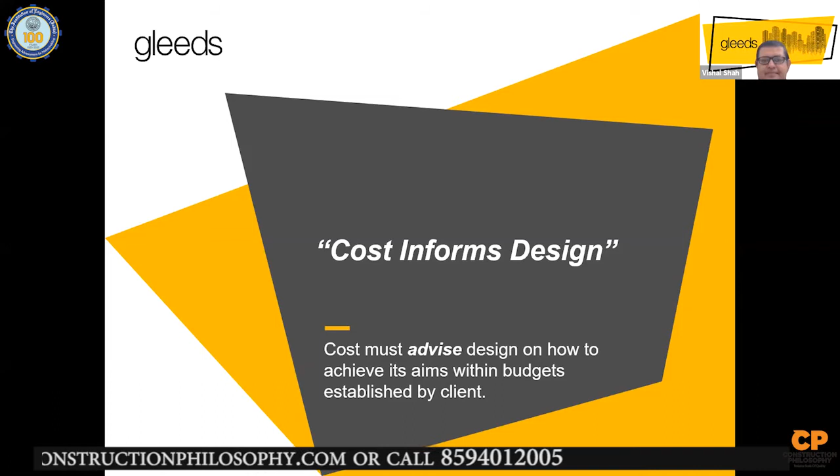As a cost manager by profession, my belief is the cost should always inform the design. So design can take the right decisions and right options so that the budget which is established by the client is met and optimized. So the cost manager's role should always be a supporting role to the design. We don't want the designers to not experiment. We want them to experiment. We want them to create great structures. However, at the same time, we want to make sure the budget which is established by client is proper.

So in cost management, there are basically two major aspects. One is pre-contract and one is post-contract. In the pre-contract, basically we talk about anything from initial design stage till the award of the contracts, which also includes various cost estimates. It includes escalation, contingency, value engineering and management, which Kashi sir has already started explaining you since the last couple of sessions. We also talk about benchmarking. How do we make sure the project is optimized and done properly? And then we go to the procurement route, which way to procure the contract, what should be the tendering process, how do you evaluate the contracts. So these are the major aspects of pre-contract cost plan.

And when we go to the post-contract, which Sini will take over in her sessions, it's basically after the award of the contract, what happens? How do you manage the cost on site? How do you measure things? And how do we ensure the project budget is kept within the allocated numbers during the post-contract? She will also touch base on the claim management part of it. So we have two sessions on pre-contract. Today we're gonna talk about the green part, from the development cost of the project to the benchmarking. And tomorrow we'll talk about the procurement routes till the contract.

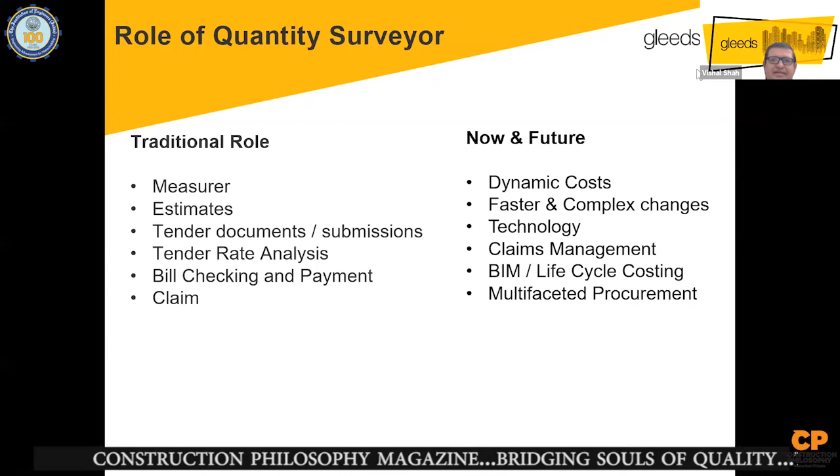And now the procurement methods have completely changed. Earlier, there used to be a master builder; you would buy the material, and he would do all the labor work, but that's no longer there. Now things have changed into alliance contracts, integrated project deliveries, or design and builds. So there are various aspects which we will touch base on during the course. There are many of these aspects which a quantity surveyor is expected to know and expected to guide the client on, right?

So this is what the budding QSs and the professionals need to understand, that we are no longer the guys who would do the measurements. We are no longer the guys who will certify the bills. Yes, it's part of our job, but our more important job is to make sure that the client has the right information to make their decisions.

There are various asset classes and various kinds of structures, from residential to warehousing to data centers to commercial buildings to retail malls or hotels. One really needs to understand each project typology to see where the cost would be. How do you make sure the project is rightly done with the right and optimized cost, right?

When you look at the cost aspect, there are various types of cost. There is a land cost, there is FSI or a TDR, what we call in Mumbai, and FAR, what we call in other parts of the world. The building and site improvement, the interior fit out cost, then the approval cost to get the permissions. Then we need the money, so pre-opening cost, working capitals.

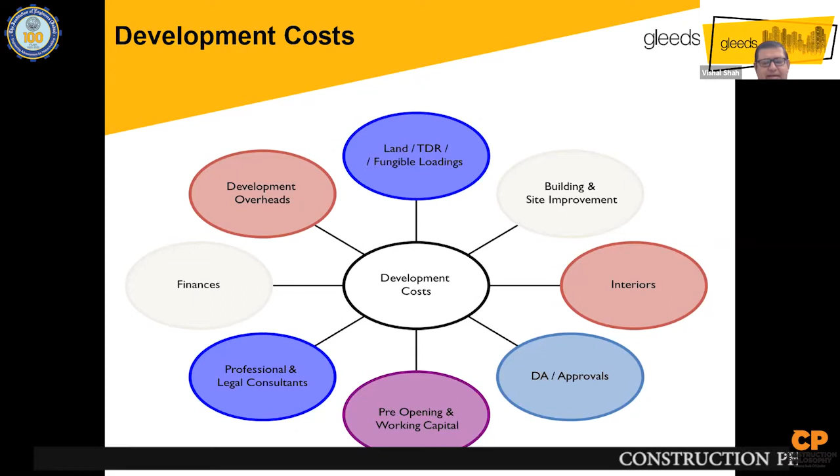But when you work as a consultant, you probably have understanding of both aspects almost simultaneously, because at times the client would share all this information, most of it, to make sure that the feasibility numbers we are providing are correct, right? So just going back into detail of all this development cost, right?

So when you talk about the stamp duty registration, this is just to give you a flavor that when we talk about land, it's not just the land. There are other aspects associated with that, which you need to consider when you're putting the numbers together. So it is not just land, but the registration cost, the taxes, the legal or tech due diligence the client would need to take, the market research for feasibility, the brokerage we need to pay, and the approval cost. So all this is part of my land and approval bucket, which I need to consider.

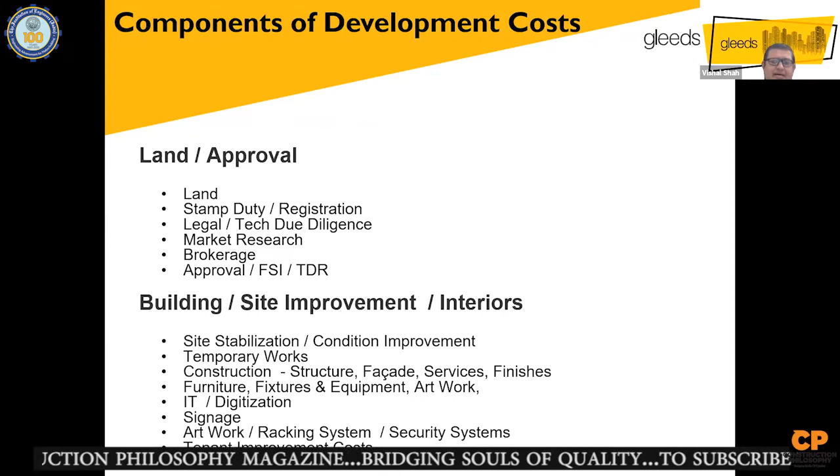So when you look at the site and the building improvement, at times you need to go with piling, or at times with raft foundations, or you need to do temporary works to make sure the work happens, like diaphragm walls, and the different types of structures, the IT cost, and especially in malls, tenant improvement comes in. You provide the structure and common area, but in some of the larger spaces you'll do some improvement for the tenants who will come in. So you need to allocate money towards that, right?

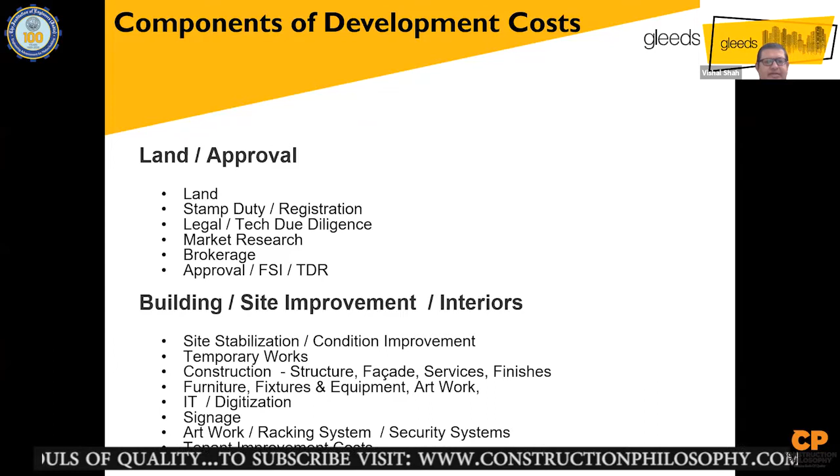Then you need to look at the operational cost in terms of OS&E, or first fit, as we call it for hotels. You need to give, like, three sets of spoons or five sets of plates. That's also part of your development cost, because without that the project does not start. When you launch the project, there is a marketing cost, parties you probably need to throw, and you need to make sure that all the snags are closed out. So these are various aspects of development cost which one really needs to understand before we put the final numbers together, right?

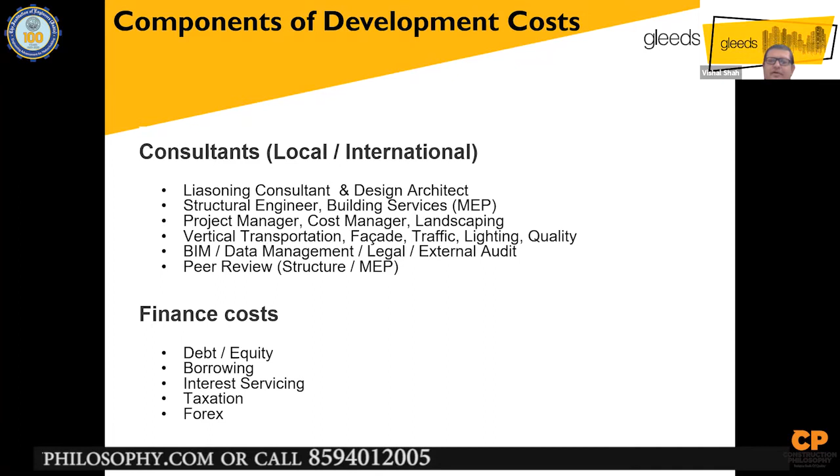There are risks which you need to cover. For example, Forex, that's a risk you need to cover. There are internal costs and internal risk costs which you need to carry. The insurances you need to purchase, right? So all this is part of my development cost. So when I look at the overall project cost, I need to look at all these aspects before I start putting down my numbers. How do we take care of the whole process of cost management?

There are various ways AACE has done it, or even RICS or RIBA. There are various stages, as they call them. The typical and standard terminology in the industry is feasibility stage estimates, concept, schematic, and DD. These are the four major stages where the design gets developed, and you use this time to fine tune your design and make sure the project is proper, right? At each stage you need to provide a cost estimate or cost plan, which needs to be tallied with the client's internal sign off that okay, this is the project.

For example, I was part of a project in Trivandrum where we did a hotel, Taj, and the client said, look, I have X amount of money. I cannot spend beyond that. So the cost manager's role is to make sure that it happens before that, right? So these are the various stages. We'll go into detail on this as well.

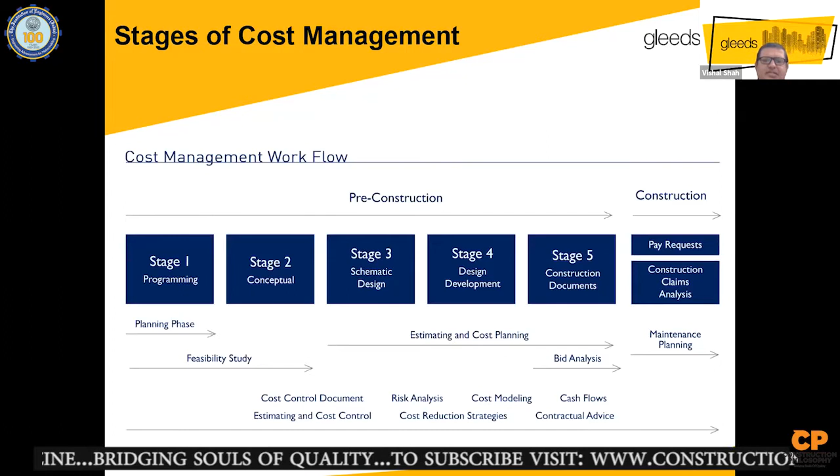And during this process, we need to carry out value management. We need to carry out risk management. We need to carry out options engineering. We need to look at what's best and the life cycle costing around it, the whole life cycle cost. So all this needs to be done during these phases, right?

All right. So when do we really start cost planning? Cost planning can be started as soon as you have a cost planner engaged by the owner on board. At times the cost manager is on board before designers, because the client wants to know: okay, this is a piece of land, this is the kind of project I want. Can you tell me what is my cost? Whether I can afford this or not, right?

They might have a concept or they might have a sort of a benchmark project. Okay, this is a project I like. What can be done in this area, at this price, and tell me whether it works or not. So the cost manager provides them an initial feasibility cost estimate. This budget, if signed off, then needs to be monitored during the design and construction phase by the cost planner, who will advise the client at various stages.

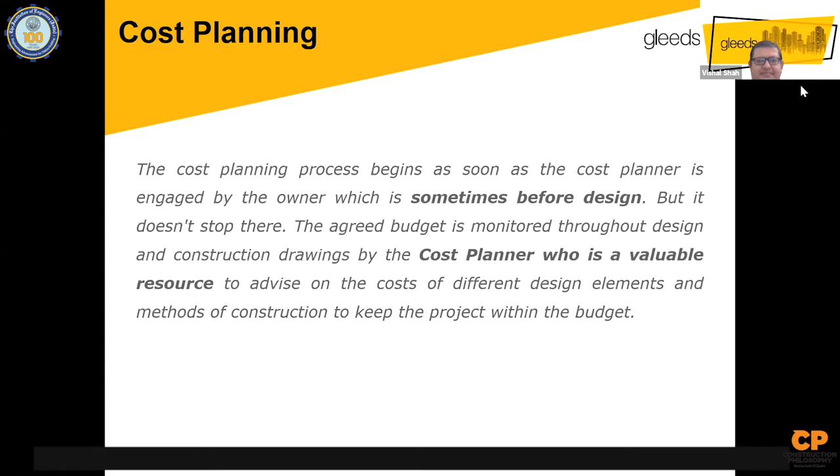Cost planning allows us to do the feasibility of the project, right? And as I said, the cash flow of the project. Again, through cost planning, I would be able to provide the cash flow so the client can understand by when they need money and how much money they need, so they can be ready with the funding available.

Why do we need to do cost plans? Cost plans need to be done not just on a back of the envelope calculation. It has to be done in a scientific manner, in a required process, because the professionals the client hires are expected to have in-depth knowledge of the local market rates, the processes, the contractors, to understand what can be done. Can we go with two basements? Can we go with a single basement? Can we do podiums? Can we change the facade type? Can we go with precast construction? All that is expected to be known, right?

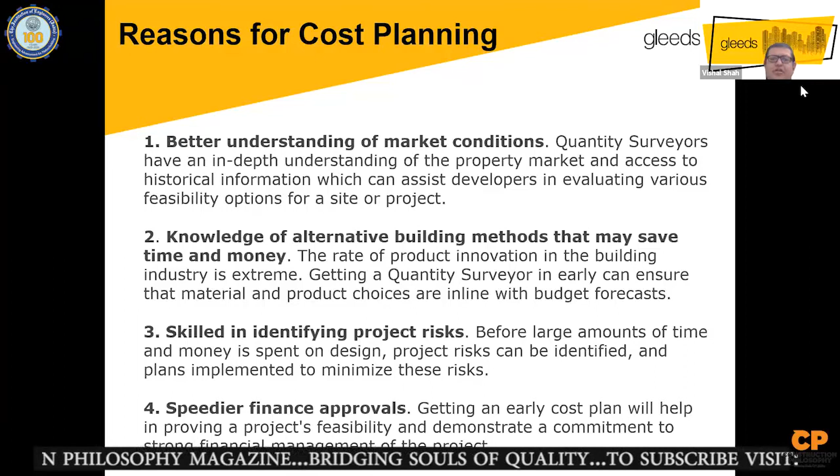And as a cost manager, you are expected to identify the risks on the project. So before spending too much time and money, the client would appreciate if you tell them, okay, these are the project risks, and this is what needs to be mitigated. Otherwise, you will have a project, and the project will have a problem, right? So these are the reasons for doing the cost plan.

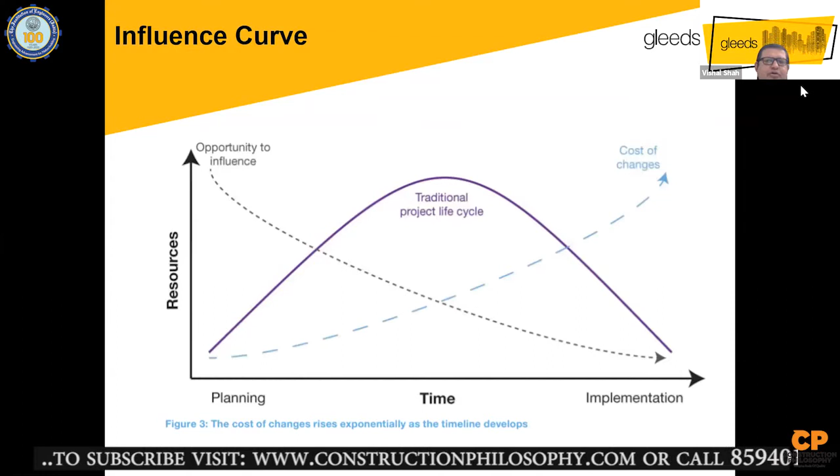Now, the place where cost managers can add value, and Mutaya Kasi sir would agree to this, is at the front end. The professionals can influence the project at the initial stage, during the planning, before detailed design. Because after detailed design and at construction, we are just trying to control it. The cost of change will go up and it does not make any financial sense to do it. The project is actually lost.

So the opportunity to do anything in terms of optimization is at the initial stage. And that is what needs to be done through the cost plans: identify those issues, inform the client and the design team that this is where the problems are, this is where we are going overboard. Can we look at this and can we optimize this?

For the various types of cost plans, if you see AACE, they have done it based on different classes, class 1 to class 5. And they have also provided a range of accuracy based on their understanding, based on the standards they adopt. So at budget level, at DD level, or at concept level, what sort of estimates are required.

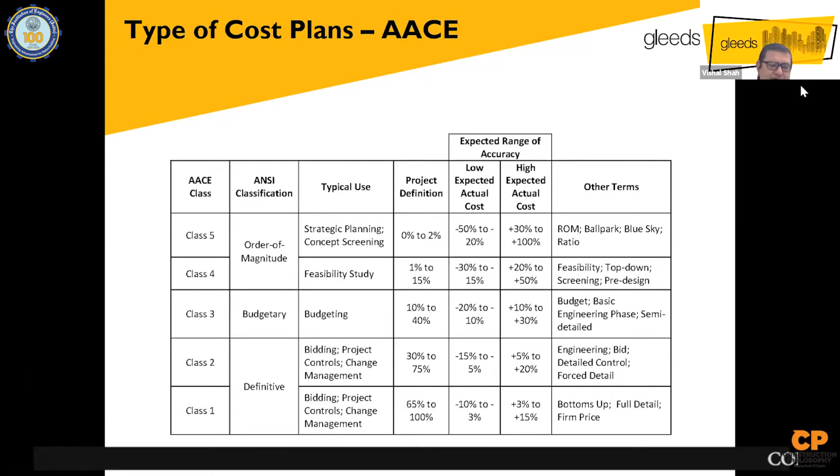However, what happens in reality is clients expect cost managers to provide very close numbers, plus or minus 15% at the feasibility stage. They want to make sure that the cost managers they hire, internal or external, have that kind of accuracy or understanding of the market, so that you are in the right ballpark, because that is where the major decisions need to be taken. So these are the stages.

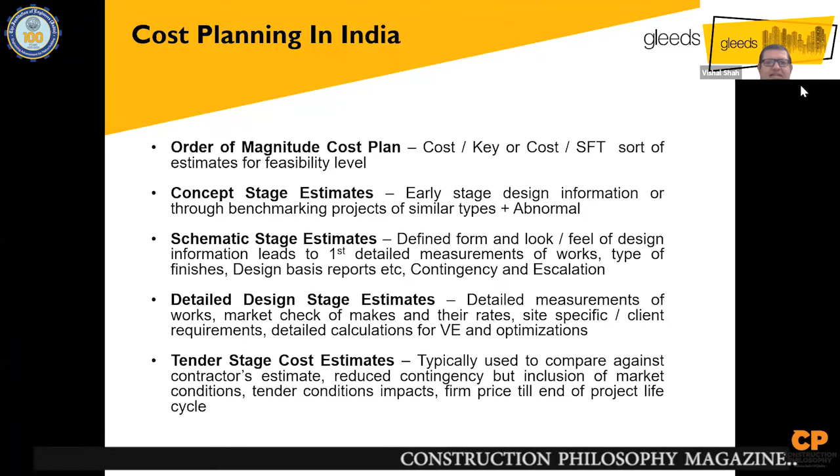However, when you look at India, we carry out order of magnitude cost plans, concept stage cost plans, schematic, DD, and tender stages. And all these cost plans happen along with the design. So the time you have available to carry out your study is often in conflict with the design program. So the cost manager is expected to work along with the design team as much as possible and try to provide the numbers so that design decisions can be taken.

Yeah, right. So how do we do the cost plans? What's the process? The process of cost plan is, before we start the cost planning, we need to understand what is the basis of the contract, how the project is going to go, what is the project schedule.

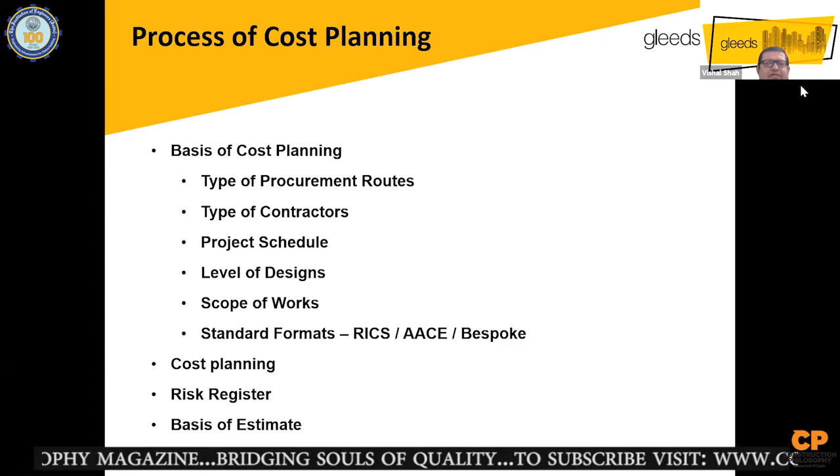What level of designs we have, what sort of information we have, what is the scope of work, what is the battery limit for the project, what can be done, how would the client want the estimates to come by, what kind of formats. And obviously we need to generate the basis of estimates, we have to generate the risk registers, as well as the cost report, which has the amalgamation of everything we have done for the project.

Right. Before we start on the key cost drivers, I just want to mention something here. When you look at the project, look at it from the sense of how this project looks, where the project is going to be positioned, what are the abnormals for this project, what is different here compared to other projects, and try to walk the project in your mind before you start doing the cost plan. This will help you formulate your questions and your thought process, so that your estimates become more and more robust.

One of the worst things we have seen in industry is starting the project on a wrong estimate, because when you do a wrong estimate, the whole project will suffer till the end, because that number is never achievable. You cannot meet the target, and there is always a struggle for each and everything in terms of procurement, designs or selection of alternates. Everywhere you'll have that trouble. So that is what we need to think about.

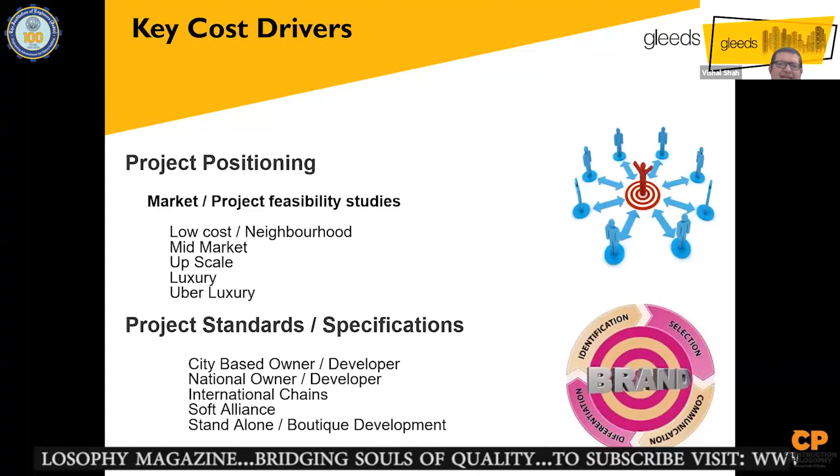So for any project, any cost plan or cost estimate, we start with what is this project all about? Are we targeting low cost housing, mid scale housing, or luxury? What kind of hotel is it, 5-star, 4-star? What kind of commercial building is it, a grade A building or grade B building? Based on that, we understand where the position is, so our mind gets fine-tuned to the type of structure, the finishes, or the type of contractor to expect for this kind of project.

The cost also differs quite a bit based on who the promoter is. A local city-based owner has a different cost. Someone from outside would like to reduce his risk, so he will go with someone who is maybe more expensive but reduces risk for him. So again, you need to understand where the project is going to be pitched and who's doing it, and based on that, the project standard gets defined.

You also need to look at the ground conditions, for example. As I said earlier, pile versus raft versus standalone foundations, or any other regular kind of issues. Or what are the locations? For example, doing something in Mumbai versus Kolkata versus Kochi has an impact on labor cost, material cost, the transportation cost for material which is not available in your city, or the cost towards imports, whether it's a metro or a non-metro location.

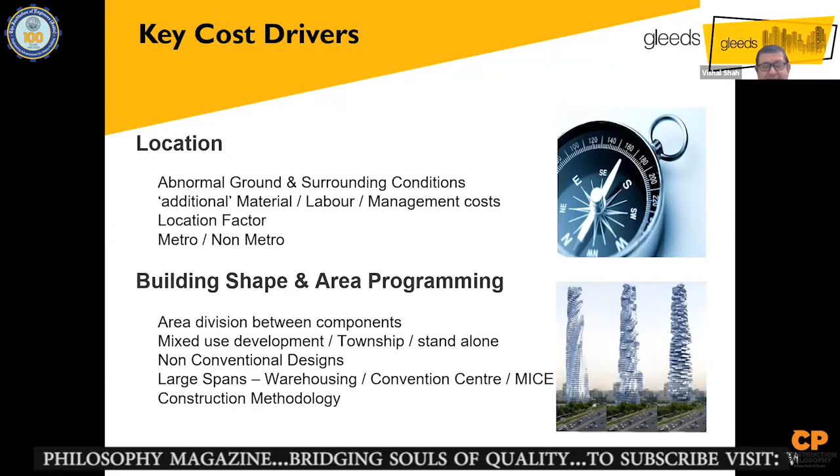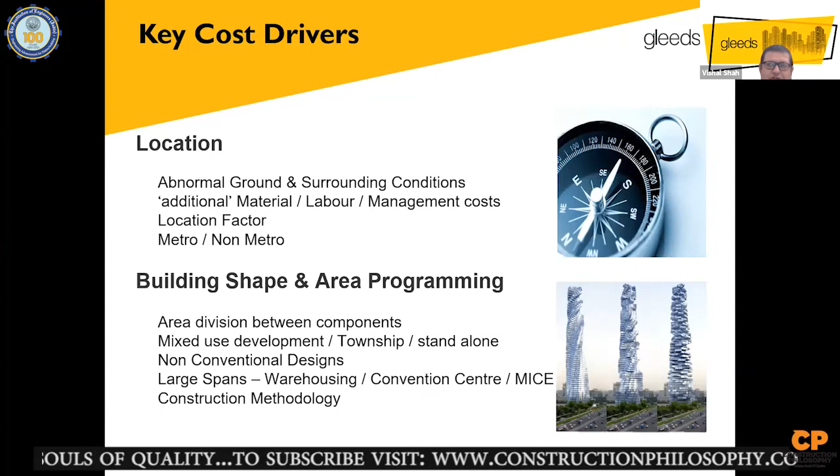We also need to see, like I said, let's take a hotel as example. So in that, front of the house versus back of the house, the components of that, how the parking requirements changes. For example, if you look in Pune right now, in Pune's market, Pune has one of the largest requirements of parking as per the bylaws, which is very different from what we do in Bangalore or Hyderabad. So that means my substructure cost or my parking cost will go up if I'm doing in Pune, right? Because my sellable area still remains same. I'm doing similar, but my parking area will require addition.

It will also require, based on the mixed use project or based on standalones, the sharing of the common utilities, the sharing of the spans will change. If you are going with a retail with 11 by 11 grid versus a residential with 9 by 9 grid, it will have different structural components. The methodology of construction would change. For example, I would have a Mivan or aluminum formwork in residential, while in commercial, I may not need to do that because I will require a PT there. So in PT, I will not use that, right? So these are some of the factors, again, you need to look at.

From design perspective, you need to look at what is the earthquake zoning in that particular area. What kind of framing option are we looking at? Are we looking at concrete? Are we looking at composite? Are we looking at steel? Are we looking at any special fire protection norms? Now, the fire protection would change: if you're doing a structural steel, you need to provide a 2 hours fire rating, which typically we don't do because we always construct in concrete, and concrete already has enough fire rating. But if you're doing it with a steel building, you need to add up all that aspect.

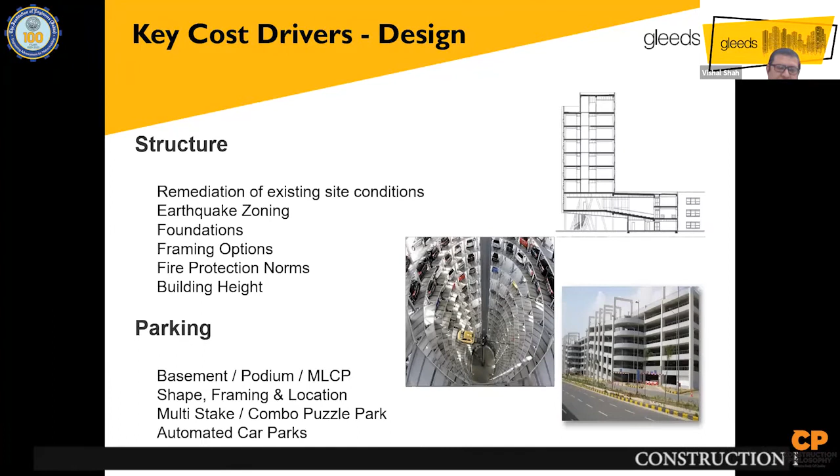And again, the typology of that fire protection, whether you go with a regular vermiculite, right, or you can go with a fire paint. Fire paint obviously is more expensive, but aesthetically good. It also depends on the type of structure. The type of structure in terms of building height. When you are doing a super tall structure, or we're looking at a G+4 or G+5 structure.

How we take care of parking requirements within the building. Are we going with 2 basements? Are we going with additional basements? Or are we going with multi-level car parks? Or are we going with a robotic car park? All depends on the building geometry, on the plan requirements and how they want to do that, and the future aspirations of the particular area. Yeah. So based on that, again, there are cost drivers.

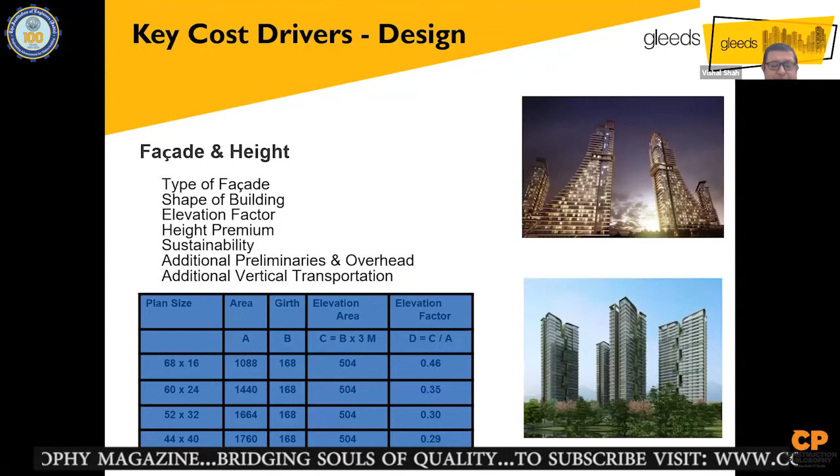One of the studies what we have found, when the cost managers look at, is the ratios. There are various ratios. The ratios of built up areas, parking to built up and that. But another key area is the facade. So in facade, the more squarer the building, right, it's better in terms of facade cost. And you also have rectangular projects where you have obviously larger lengths for the facade.

So if you see this example here, for a similar kind of areas, right, of 168 girth, but the floor plate area changed from 68 by 16 to 44 by 40, your elevation factor reduces. The lesser the elevation ratio, the more optimized the facade. And especially when you look at the tall towers, right? In tall towers, the wind pressure creates a huge effect. So you need to make sure that the design which is done is proper in terms of wind pressure and how you're breaking down that wind, right? So those are some of the cost drivers we need to consider and think about.

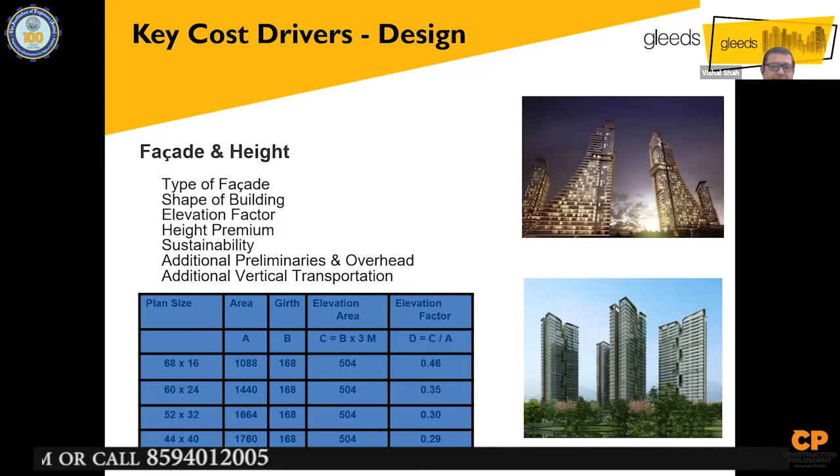So as I said, the area configurations earlier. Now, there are many projects we have seen at times where the areas are not correctly done. The room versus FOH versus BOH. Obviously, everyone wants to reduce the back of the house as much as possible, right? But what happens is the FOH area. FOH is front of the house, which is basically your lobbies, your kitchen, your restaurants, your banqueting areas, and all that.

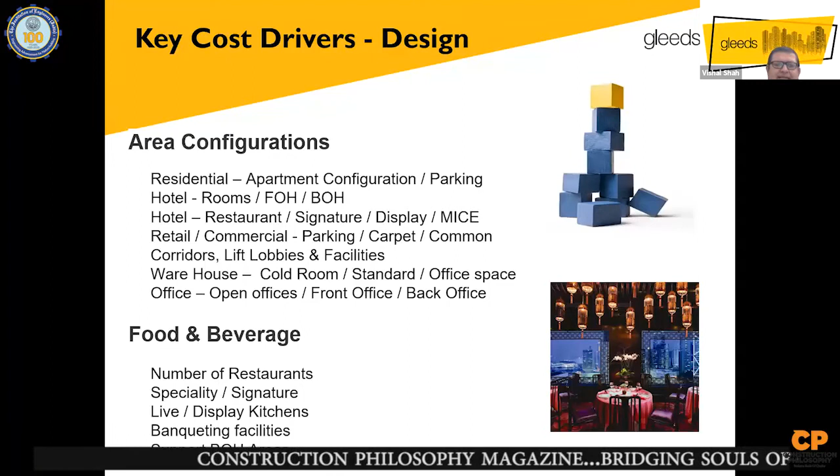If that is higher compared to your other benchmark projects, obviously your cost is going to go up, because you are putting everything on a cost per key basis, since that's one of the standards the hotel industry looks for: can my standard 5-star hotel be done in 85 lakhs a key? And because the areas are different, the cost per key shifts, and people, especially the owner, will start questioning why my costs are high. The way to explain to the client is through a detailed area statement, showing the difference in the areas and examples of why the costs have gone up while the keys are not getting added, but the cost is increasing, right?

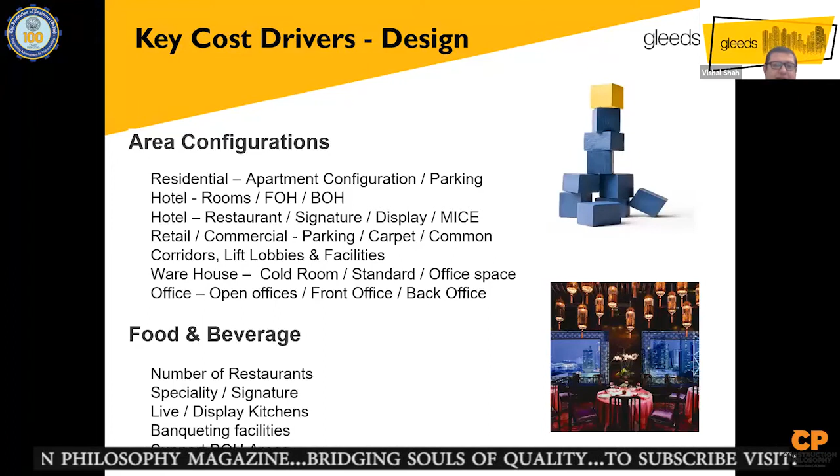The other area configuration in all the different asset classes, you can take a look. For example, in a warehouse, the amount of cold room space or office space; in restaurants, in hotels, how many restaurants, what kind of display kitchens you have, or whether you have a signature kitchen there. All that again will change our cost. Our cost plan needs to consider all these aspects before we submit to the client, right?

Coming to the building services side of it, if you're doing a project in Kochi, you may not need heating. But if you're doing a project in Ladakh or Amritsar, you need a heating system as well. At times cost managers would not take that, or at the initial stage people don't consider this kind of cost, but we need to consider all that when we work it out. The power backup requirement, the DG set, whether it's 100% DG, 50% DG or only for emergency load, will make a difference. We also need to look at the type of IT systems. The BMS systems need to be incorporated as part of the overall building.

In one of my projects, I had to bring power from about 7 kilometers. Per kilometer, I had to spend about 50 lakh rupees, and this was not part of my cost plan. So we need to consider this cost when we do the initial budget. Where exactly is the power? Is a substation nearby? Do we have the required availability here? If not, then we need to allocate funds against that.

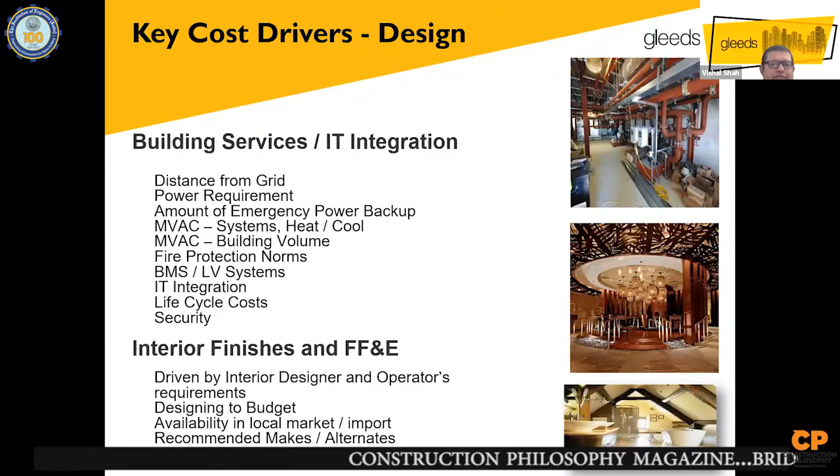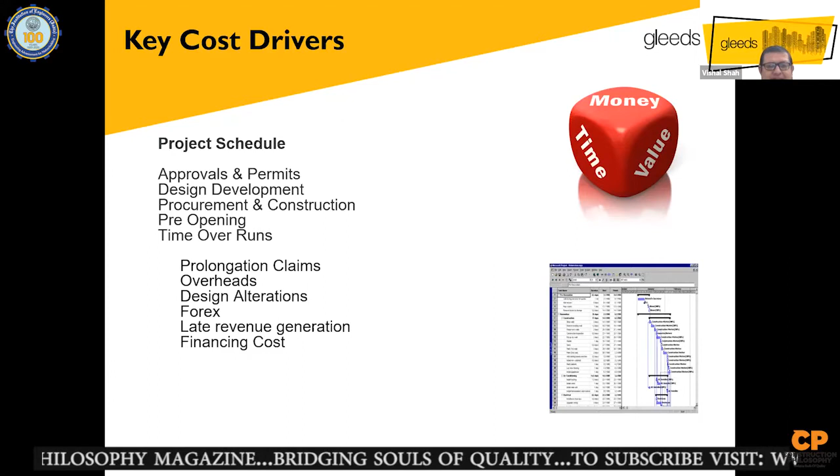Other cost drivers are your project schedule. For a smaller project, if you go with a longer project schedule because of a phasing requirement, for example, obviously your cost will go up because the contractor has to contain and maintain all the preliminary costs within that. And if your project goes beyond the agreed timeline, then you have to add all the other overheads. There could be contractors' claims, there could be forex fluctuations, and all that is part of your cost.

Another important thing you need to look at is how you calculate late revenue. Because if my project was supposed to complete in 36 months and it takes 48 months, that means I've lost 12 months of revenue. That's actually my project cost, and that's going to make my feasibility look bad. So you need to look for options to finish the project faster and better so that all these aspects are taken care of.

Other things you need to look at are the taxations. For example, what are the GST rates? In affordable housing, for example, we have 12%. In others, we have 18%. In some places, we have GST credits as well on the running expenses. Like in a mall, I can buy furniture and equipment and get a credit for that. So how do we take care of that? How do I get that money back in my kitty so that my client gets a better feasibility for the project? We need to consider import tax.

If your project is located in special economic zones or is an IT kind of project, then you need to have the cost benefit for the taxation. So all that you need to consider as part of your initial thought process in putting your budget and numbers together.

Another thing that always surprises me is the site development cost. The site development cost is a direct derivative of the area available for the site, to beautify the site, the road, the lengths, and all.

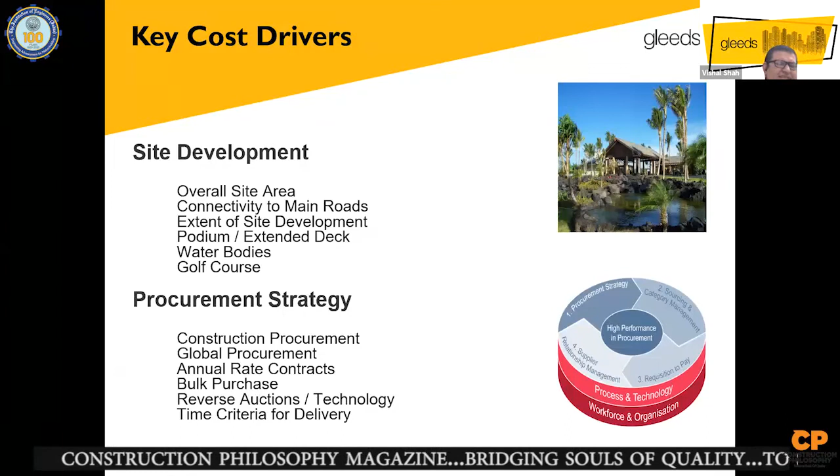It's not on a cost per square foot, because all your other benchmark costs that you take, okay, I've done it at 3,000, I've done 2,500, all this does not have that. And when we go into benchmarking, we'll touch base on that.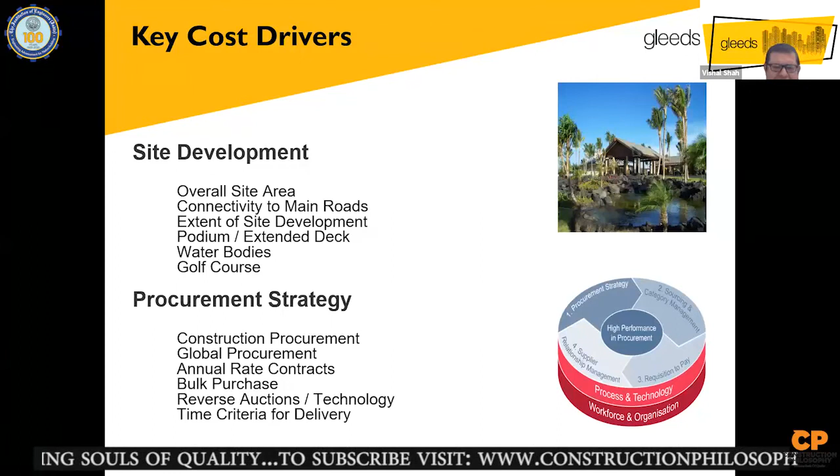Basically, what happens is that the client will have a large wish list, right? And it is our duty to explain that, okay, this is what this project has, and these are the add-ons, what we call a waterfall analysis, which we'll share again in the upcoming slide. So this kind of information needs to be provided, but you can provide it when you consider it. So when you look at the project, look at all these aspects before you put down the numbers. Ask yourself, okay, this is what is happening. What should I do here, right?

Again, when you look at the type of procurement, how are you going to procure everything? Whether it's a labor contract, or a material plus labor contract, a grade A contractor, grade B contractor, an international contractor, a composite building. How am I doing this? Okay, I have another 5 projects. Can I do a bulk purchase? Can I use reverse auction technologies? So all that you can work out along with the client when you start detailing out your design cost plans, concept to DD. Yeah.

So the type of procurement affects us. It affects various aspects, right? And we need to fine tune this procurement method at the initial stage itself. At the time when you do your initial cost plan at the concept, this should be at least more or less agreed with the client.

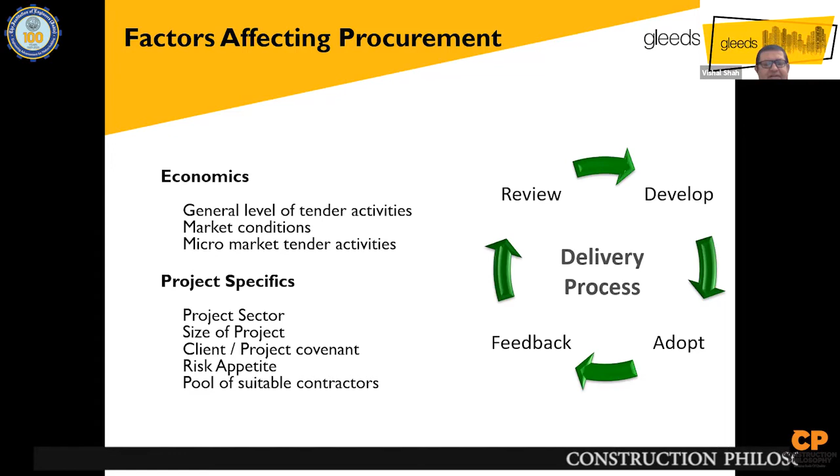So obviously there are various aspects, and it depends on the risk appetite of the client, the market condition, whether we have enough contractors over there. For example, if we're doing a project in Maldives, there are very limited vendors who are able to do it. And sometimes you will probably need to get people from Sri Lanka to do that project. And that is a different costing for those guys, right?

So you need to understand all this when we are looking at the initial cost plan, because otherwise, as I said, if your initial cost plan is wrong, you will get in trouble along the way, right? So design bid build, or a main contractor, or D&B, or alliance. Every one of these procurement routes has different cost parameters. It has an additional cost, right?

So if I'm asking someone to do a design build, the risk for the contractor will go up. So it's not going to be the same price as my design bid build. There will be a difference. If I'm asking a civil contractor to coordinate all other contractors, that means I have to pay him some additional cost towards nomination. I need to consider that as a part of my project budget.

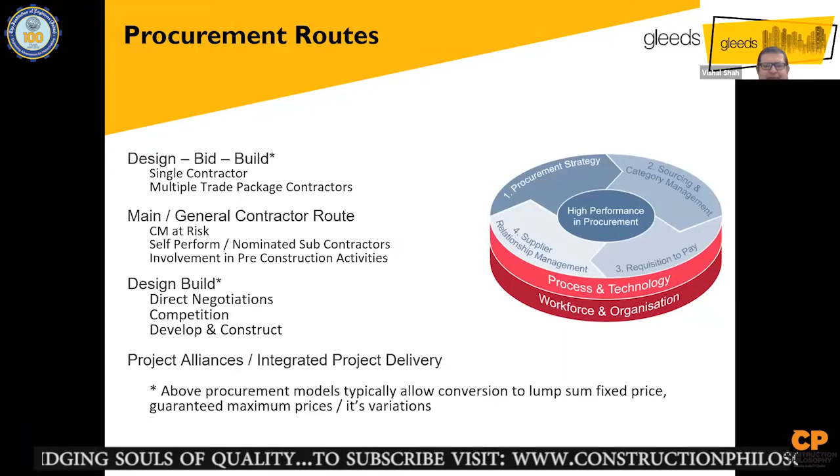Or if I'm doing an alliance contract or an IPD, there's a different way of calculation. It could be a cost plus as well, right? So that means the client needs to carry a higher amount of risk because it's a cost plus with the targeted GMP price, right? So it will have different methods, and you can obviously play around with different ways, mix and match, depending on what is suitable for the project.

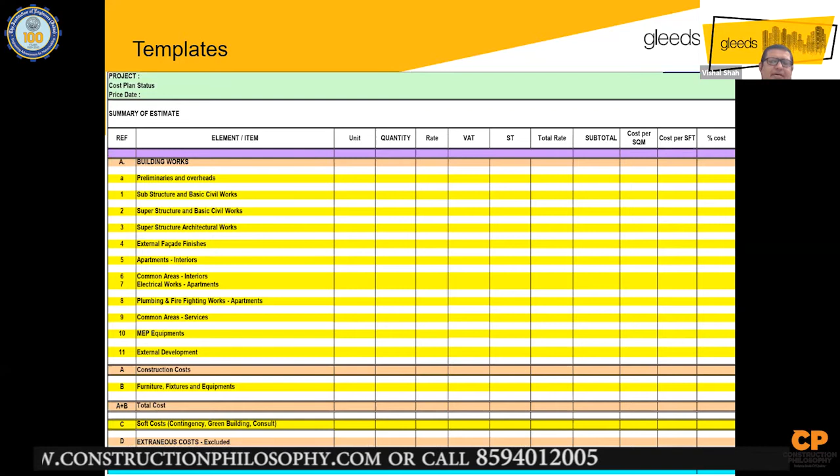You also need to agree with the client on what sort of template you want to provide. There are various templates. There are forms from RIBA, Royal Institute of British Architects. RICS has templates. Sini, as she mentioned on that day, she and her team have worked on international standard of measurements, and there are Indian IS code based ones as well.

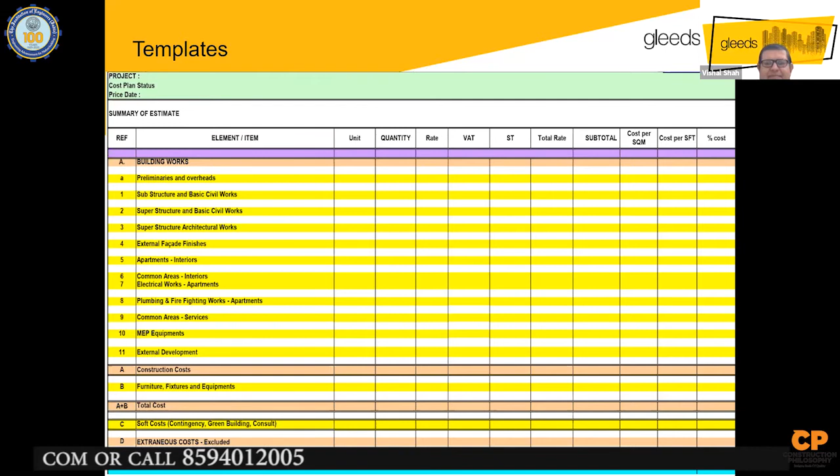So you need to agree and understand with the client what sort of template they want, because it becomes a very tedious and difficult task if you prepare a cost plan and the client says, okay, I don't like this format, can you change it to a different format? Because that means rework. That means you could even miss out on something, and it's not the right way to approach because the deadline will be missed, right? So the template, you need to agree with the client.

Typically what we do is we would like to have the basement cost separately. So that's the substructure and basic civil cost. We'd like to keep it separately, and superstructure we keep separate. And superstructure will have all of the superstructure costs along with that, right? So external facade, or apart. I mean, this was a residential template, so the common area as well as apartment interiors. So agree with the client what you need to do.

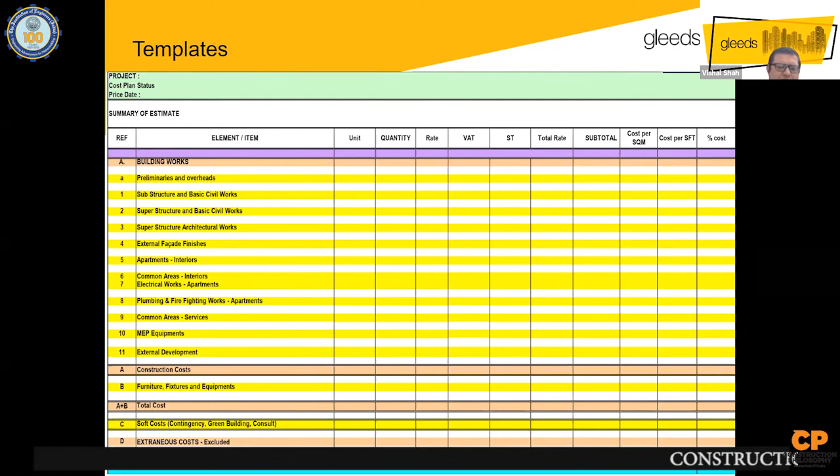Any questions till now? All right, moving on.

Right. So when you do the estimates, you need to make sure that your project budget has escalation and contingency, and adequate contingency and escalation. So if you know the market, if you see the crude price which went down drastically, or the US dollar which has increased drastically, uncertain labor. I mean, forget about COVID as a situation, but in general, labor is becoming less and less, and the price of labor is going more and more.

It's increasing quite a bit, and then obviously we are looking at any other escalation which happens as part of the overall project life cycle, 2 years, 3 years, 5 years period. How do we take care of that when we include it in our cost plan or even in tender, right? So just breaking it down in a different way here. Typically as a cost manager, I would like to have three types of contingencies. One, I would put for my design. So anything I've assumed from the design which is getting changed.

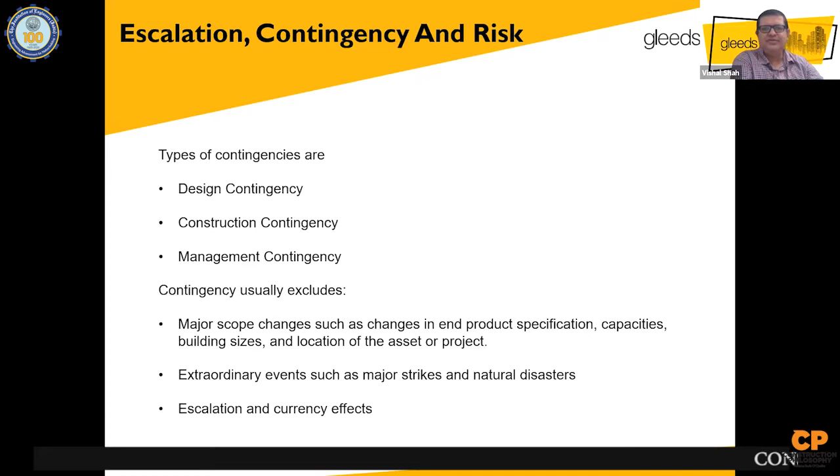The unknowns at site, especially when you start digging the foundations or the basement, you will encounter a different strata than what you assumed. In Bombay or in the western part, you typically come across the issue of soft rock versus hard rock, or there are issues related to the neighbor buildings where you need to do shore piling properly to protect the structures. Or when you start the excavation, you might come across old RCC foundations, right? So again, all those are unknowns which you have no control over.

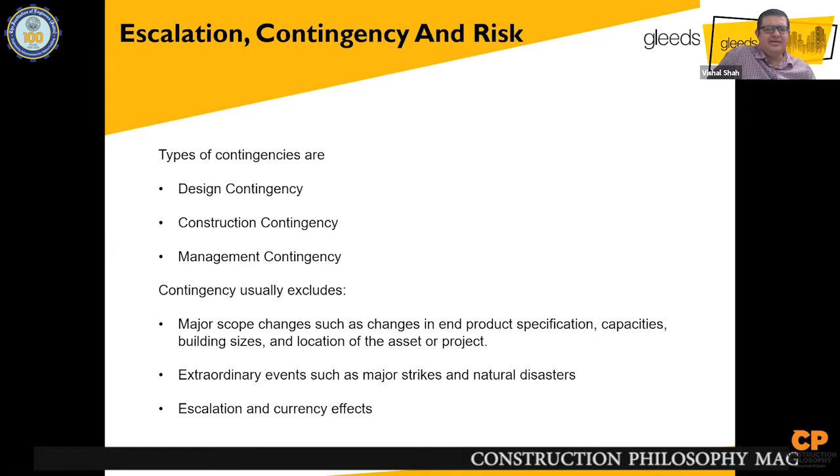There could be huge dewatering requirements on site. You need to carry a contingency towards it and make sure it is adequate. It should not be too high or too low. It should be adequate contingency to cover this kind of risk. And then you'll have a management contingency, where basically a client will decide, okay, I want to spend extra on artwork, I want to spend extra on signage because I want my building to look good. So that's a management contingency. That's a reserve which the client will have. But these are the contingencies which you definitely should have in your project when you plan it.

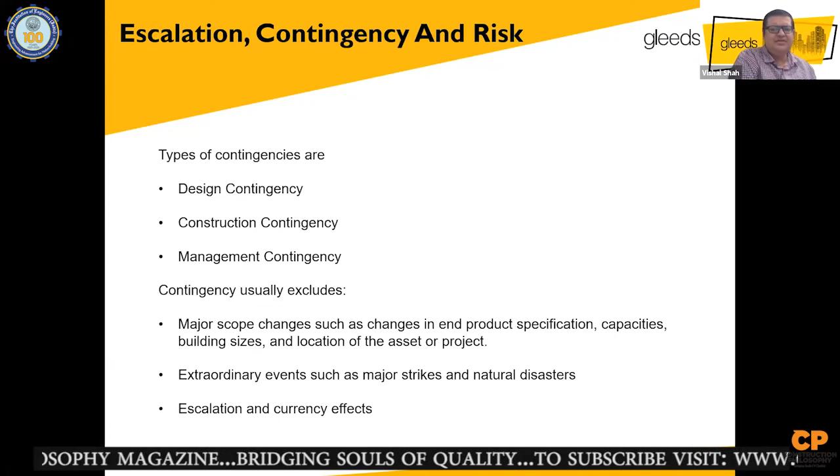Obviously, it does not take care of any abnormals like COVID-19, right? It's abnormal. No one can have that cost covered. Or any kind of major war situation, where escalation and currency effects will have a major effect. But whatever we know, we should price as per normal. The other way is, how do you take care of these contingencies?

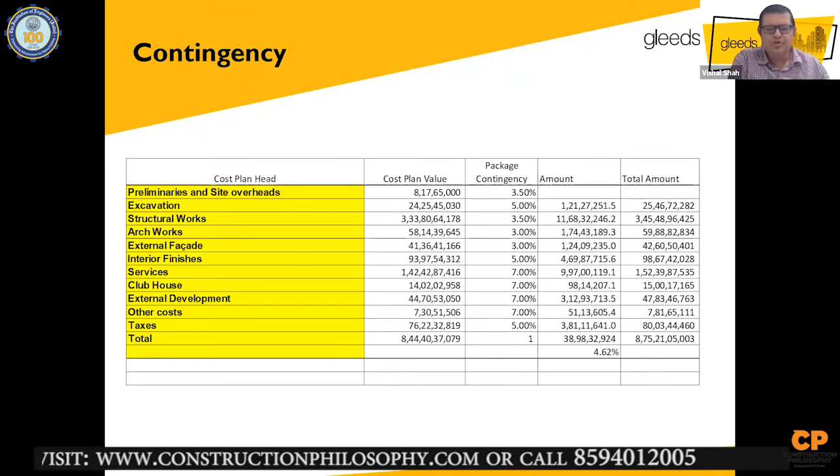What we typically do is we break down the project into various elements, and for these various elements we try to provide the value: okay, in this project this looks dicey, it does not have enough drawings, the risk is higher, let's go with higher contingency amounts. Don't go and agree a flat percentage, 3%, 5%, or 7%, whatever. Don't go on that basis. Always try to break down which element has a higher risk and which element has a lesser risk, and based on that you work out the package contingency.

So for example, in this case I've broken it down to ratios of 3s, 5s and 7s, and I've worked it out, right? You could have a different approach as well. You could put it down based on a risk analysis, which will come in the next few slides. You can even provide based on that. So again, based on that, your contingency value should come, so that anyone who's looking into it will be able to tell, yeah, it looks fine, or yes, there could be a potential issue here, and can go with higher contingency or lower contingency.

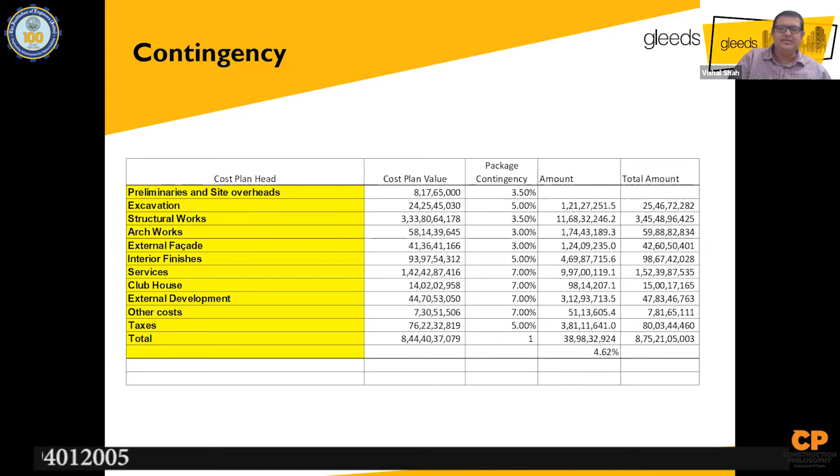Another aspect we come across is escalation. Unfortunately, in India, we do not have a right tender price index. We used to have one from CIDC, which they used to publish till 2019, but now they have stopped after GST. And CPWD is not really used properly for the private sector. So you need to work out your escalation. There are ways to do it. Gleeds have done their own. I will not bank on that; I will talk more about that. But there are ways to work out an escalation you need to consider as part of your overall project, right?

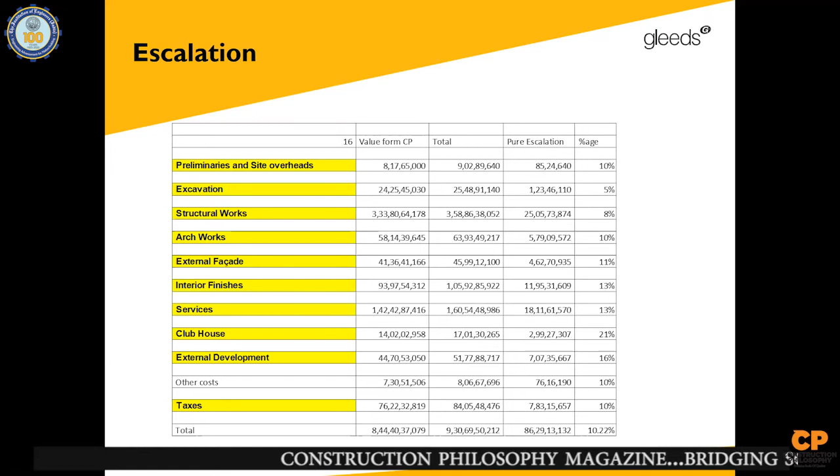The way we do it is based on a cash flow. We break down the whole package based on the project schedule, which quarter I'll need which amount, and based on that I work out my quarter to quarter escalation and provide a number.

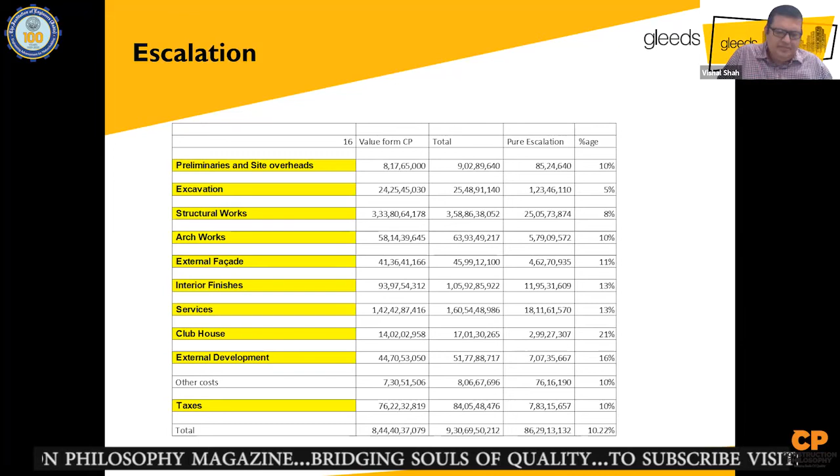One of the best methods you can do internally is look at your historical projects, look at the historical purchasing data, how much you have purchased or acquired, say concrete or steel or labor or shuttering material, and what you are pricing now. That will give you a fair idea of how much escalation has generally jumped up. Obviously, concrete and steel have cycles; it will vary. So you need to have at least a couple of projects in different vicinities to make sure that you are carrying the right numbers, right?

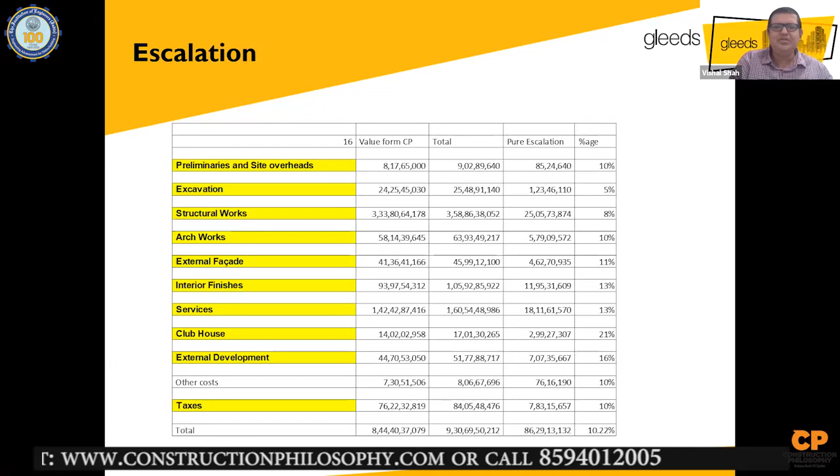Your cement price fluctuates a lot, and because of the situation we have in India, cement price is not stable, and steel is directly dependent on global trade and issues, right? So you need to take care of at least 5 years. Over the last 5 years take a few projects, 2, 3, 4 projects, work out the ratio, and then based on that work out your escalation. Don't agree based on CPWD or WPI, because again that's a mixed basket. It is not reflective of your project and your project issues.

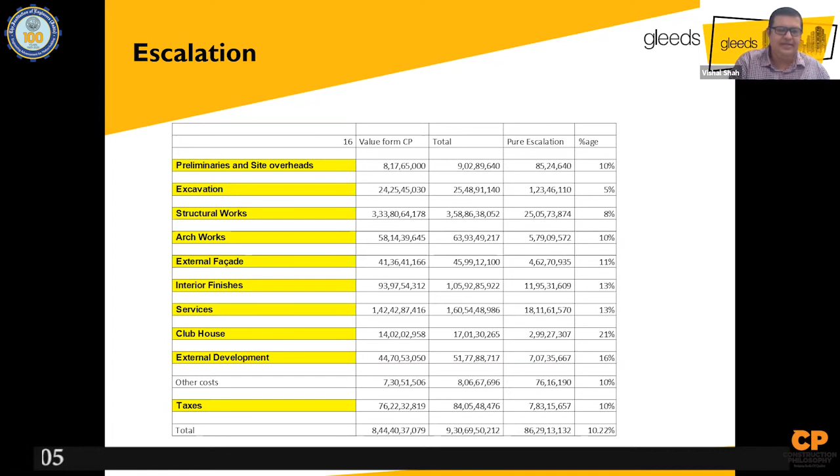For example, if you have a project which is completely glazed, your cost of aluminum and cost of glass will impact your facade quite a bit, right? But if you are using WPI or CPI, it will have a lower percentage of that impact inbuilt in the overall index. So that means you are factoring a lower amount of escalation, right? So that is something you need to consider and think about when you're putting the escalation numbers together.

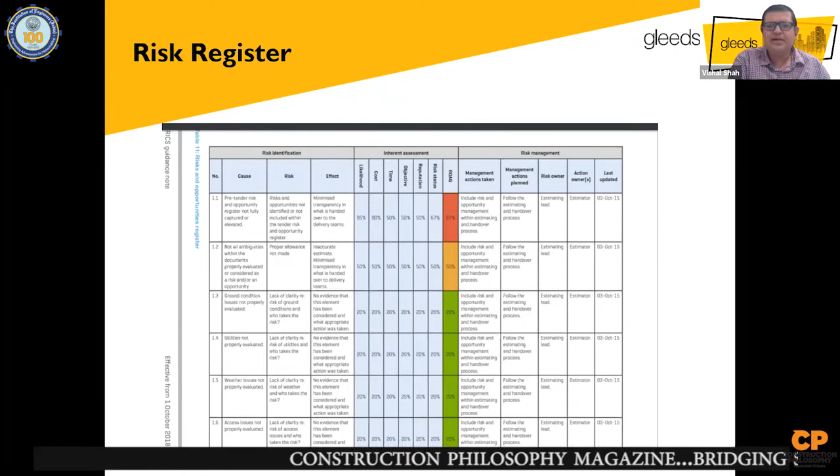The other way for the contingency, as we were talking about, is the risk register. The better way is you list down all the risks you think the project has, right? You put a RAG analysis, which is red, amber, green, and provide the value for that. For example, you are currently at concept stage, but at concept stage you do not have the foundation design. If I need to add additional piles, I can put a rough cost of piles, add it up, mark it red, amber, or green, and put a probability ratio that it looks like 20% or 30% that it will come.

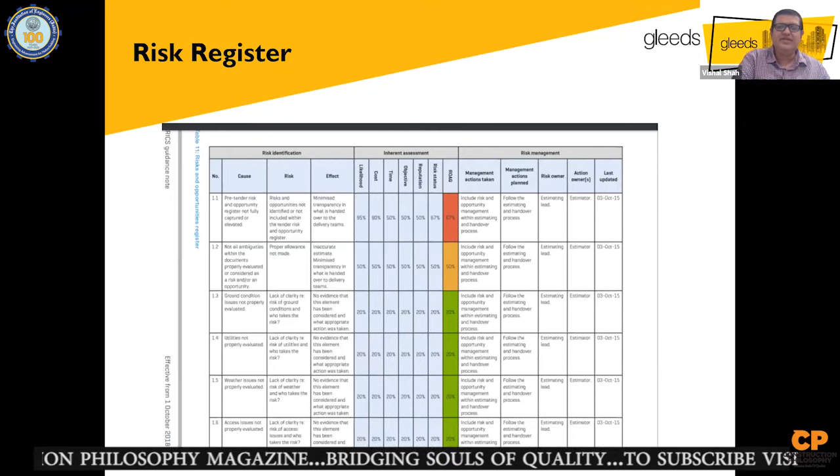Those kinds of different aspects you can consider as part of your project risk, like the project schedule, whether it can be finished in 24 months as the client is asking for or not, or the procurement or the market sentiments, or the finishing level may change because it's a long 3-year or 5-year program, and finishing standards will change, and the designer will have new requirements coming in, or the operator in the case of a hotel will have a different requirement.

You can put those costs and take a percentage out of that. Okay, these are all the risks. I'm carrying, say, 10% of that as my cost, as part of my contingency. That's another way of looking at it. How do you put

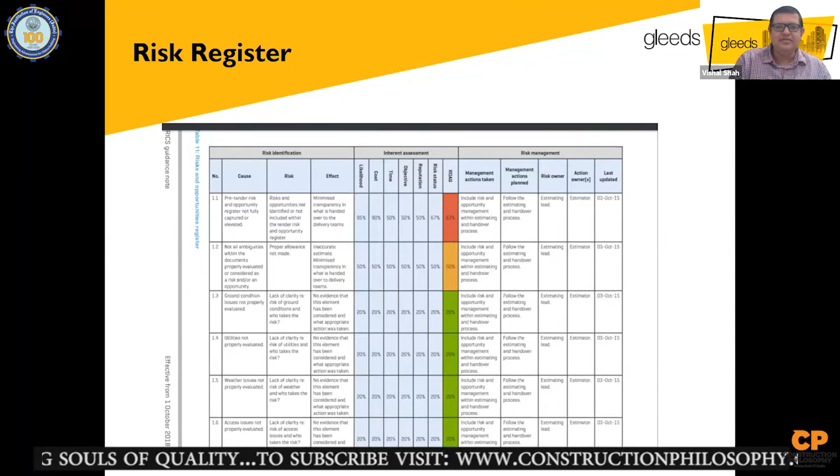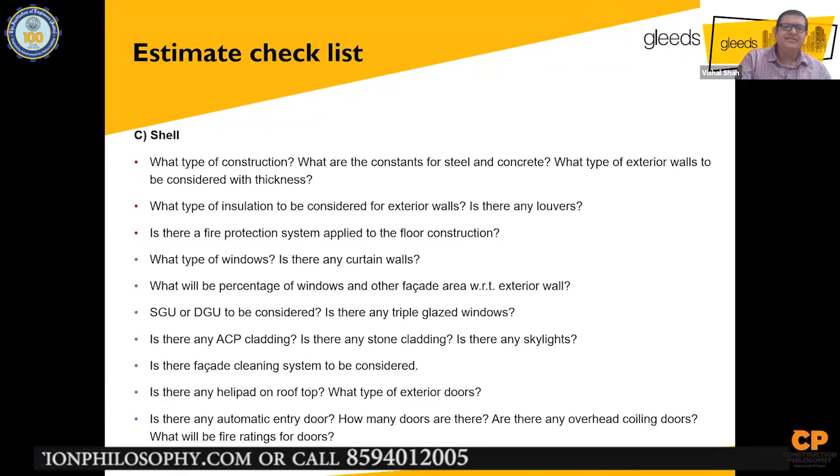Do we have the ratios available, right? Do we have double glazed or single glazed? What kind of facade cleaning system do we want? Is there any, like say, helipad coming anywhere in the building, right? So all these are the checklist you can prepare internally when you look at the project. Write down the questions. It won't take you more than probably an hour. If you've been working in the cost management domain, it won't take you more than an hour to write down the major points you need to look at.

So work on this checklist and then start ticking it off. Okay, I've checked this. This is done. This is done. For example, on one of the projects we faced a problem and there was an estimating error regarding acoustics. Acoustics is not something which is cheap, especially if you're going with the right grade A product. It's expensive. It's like 50,000 rupees a square meter. We had missed it. It was not part of our BOQ. So we need to make sure that we have this checklist and cross-check it before we release our cost estimates.

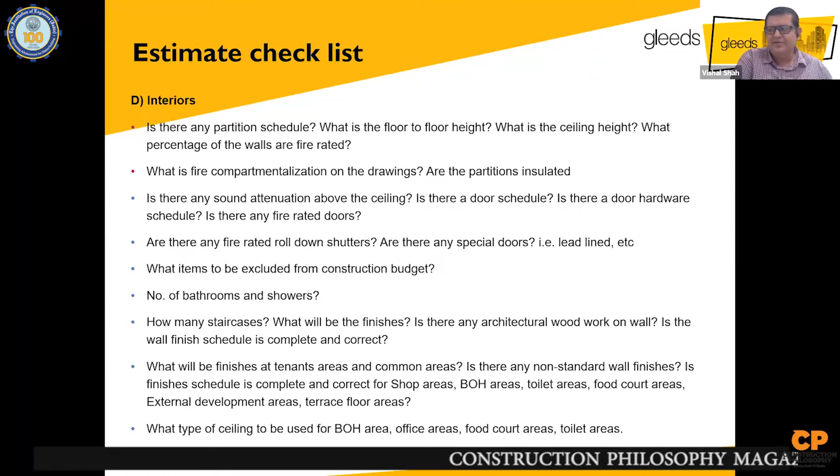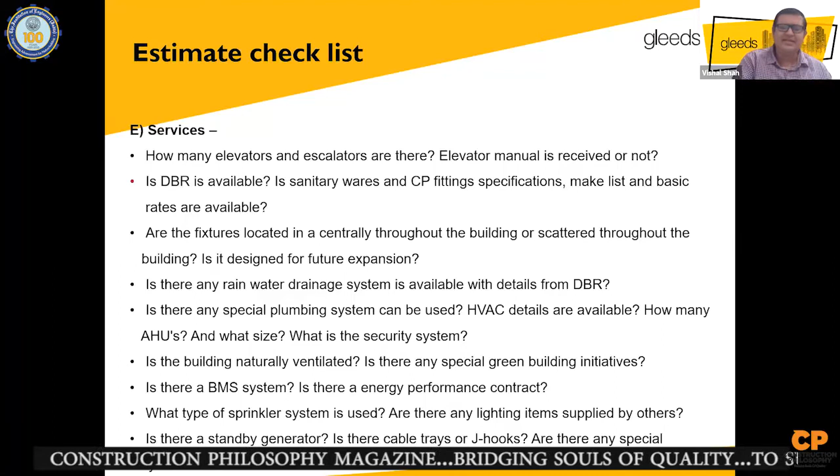And I understand that you're not going to have all the information, but there is a project team available, and the project team is expected to answer all the questions. And if not, then you can ask the client or a peer and take a judgmental call about whether this is required or not. Similarly, in building services, DBRs, whether we have AHUs, what the battery limits are, whether we have BMS or not, as I said, as part of my cost drivers. So all this is the estimate checklist you need to prepare and keep with you so that you have information available when you finally sign the estimate and issue it to the client.

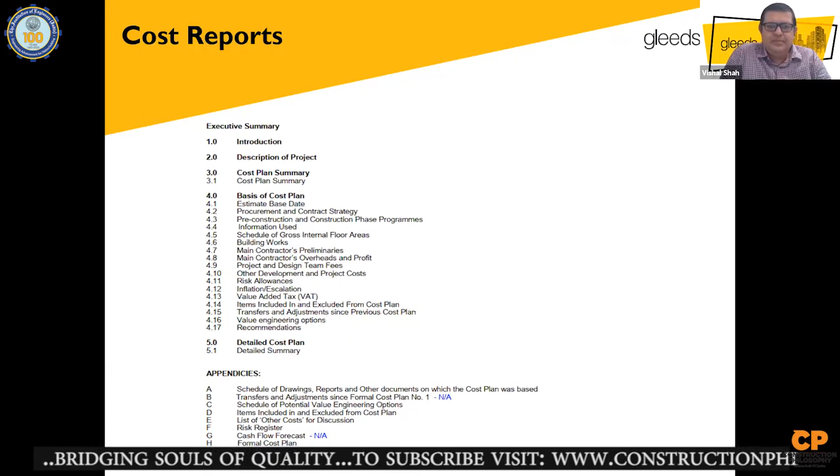Once you prepare your estimates in the required template with the required checklist done, you will need to prepare a report. Your report should be self-explanatory and should talk completely about the project. This is just an index for your information. Not sure whether you'll be able to read this properly, but it basically talks about the basis of the cost plan, when this project was priced, the exclusions, the inclusions, the project program, what procurement method has been considered, what costs are included in what heads, and the summary level with all other backups, right?

So this is a template of a cost report which you must issue, because anyone looking at the cost plan will not understand how you have derived it. What is your thought process? But in the cost report, you can put down everything you know, and that's one of the safeguard methods a PQS would use. Okay, this is what the costs are. This is the basis of it. If that basis changes, then obviously there'll be a change in cost. So until you issue that, it's not going to be proper. So this is the sort of cost report you need to issue.

When you issue your cost report, the first question the client would ask is, how does my project compare with other projects of similar types, right? It's not so simple to answer that question because each project is unique. There are similar components and items, but it is not exactly the same, right? Every project will have its own different thought process. It could be the design, the way of construction, the timeline. This was done 5 years back. Now we are talking about 6 years. We are constructing now for another 3 years.

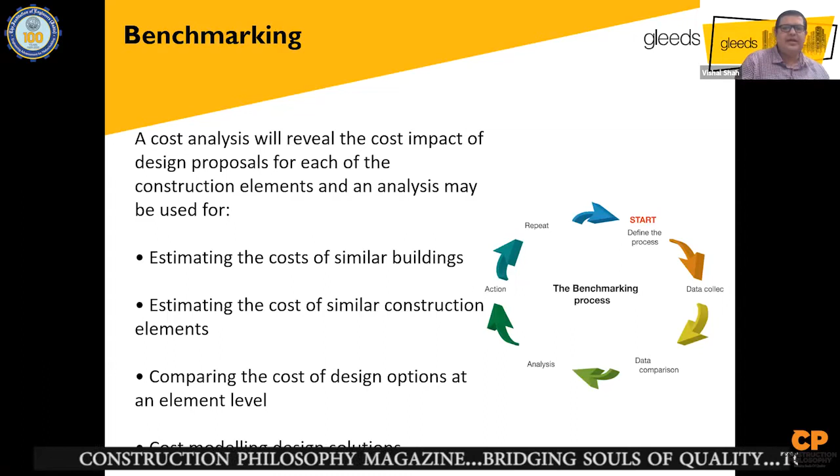When you do benchmark, obviously you will have a breakdown of how much you're spending in substructure, superstructure and all, and then you will look at the area which is the major one. Why, for example, in this project, is FF&E costing so much, right? Or why is my services cost so low? So that is what I need to consider when I'm looking at that benchmark.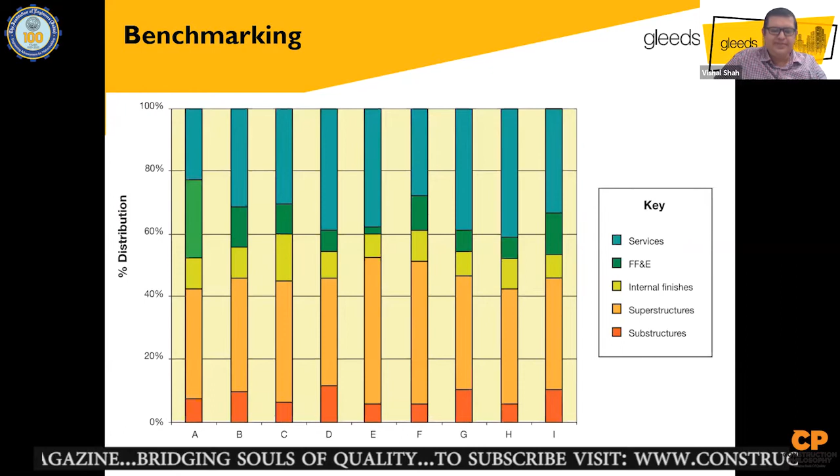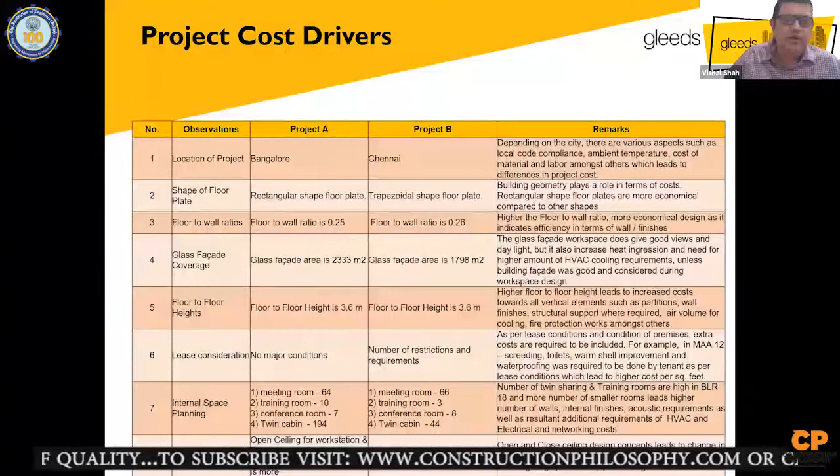Ideally, it should be done along with your cost plan, so you are pretty much sure about where you're landing and why you are landing this way. What are the differences, right? It's basically add and omits on how we work. So when we do the benchmarks, we do the benchmark based on this. We look at, like say in this project, and I'll go in a bit detail here.

We were given a project by a client, and this was about 3.5 lakhs, 300,000 to 400,000 square feet office fit out. The cost per square feet was almost about 400 rupees different. And the client wanted to know why, and this was done almost same time. When you talk about 400, 500 bucks, you're talking about 10% or 15% variance from one project to another. So the client asked us to look at what happened, why we are spending more here.

So when we did our detailed analysis, we came out with a very interesting study, something which we didn't think would create so much cost variance, but it did. So we looked at the typology of floor, right? We looked at the glass facade area, because we need to do blinds. Blinds, if not done, my chiller capacity or my AHU capacity will change. That means my electrical capacity will change, and that will lead to my higher cost, right?

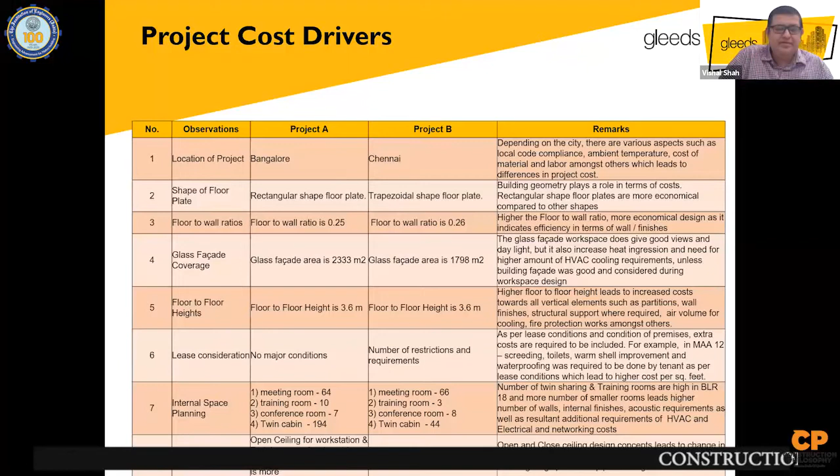Then I need to consider what the landlord is providing and what the landlord is not providing, right? Because based on that, my cost will change. In one project, the toilets and everything was done by the owner. In another project it was not done, right? What is the internal configuration? How many meeting rooms, how many training rooms; in the office project, that's what the cost drivers are. How many seats are being provided, and what sort of concepts have been done, open concept for ceiling or not.

So while these are post facto cost drivers, as experienced cost managers, you are expected to learn this as a part of your own process when you do the estimate, and then understand what is going on, why this is happening this way. So this is something as a project cost driver. And I was talking about waterfall analysis earlier.

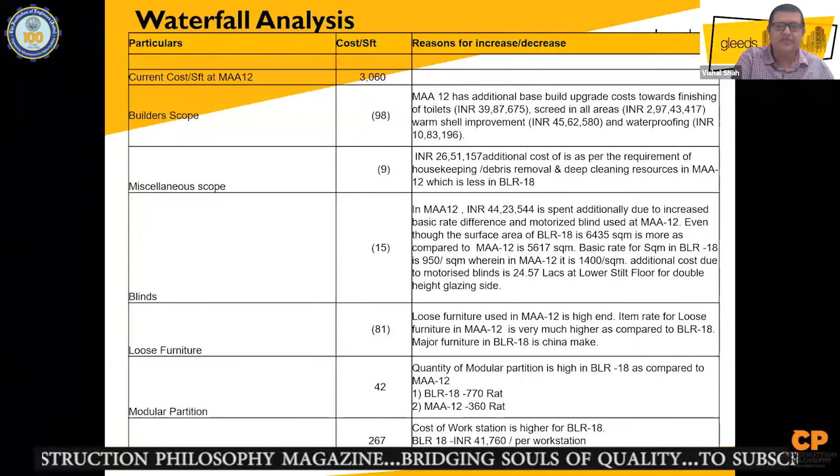In waterfall analysis, what we do is, if this was a project where we had 3,000 as a cost, we work out what are the cost drivers, and based on that, we add and omit. So based on that, if you see 3060, and my final cost for another project was 3235. However, if you see the variance and the difference, it's huge between each aspect of builder scope, or blinds, or loose furniture, or modular. Everywhere there's a huge difference.

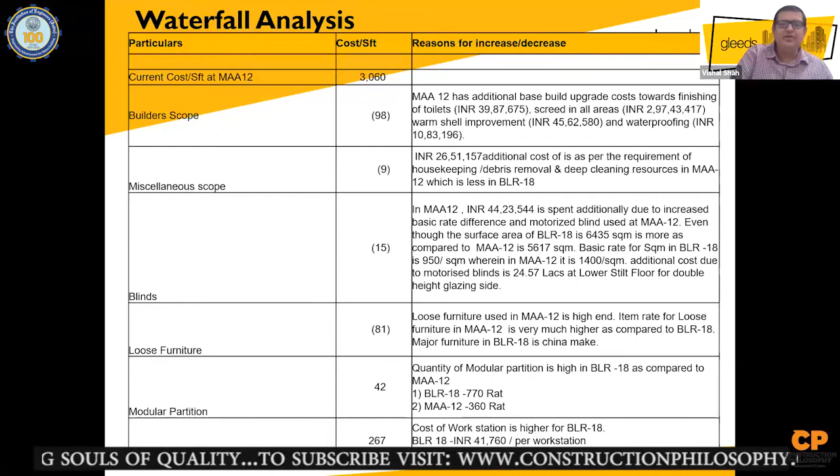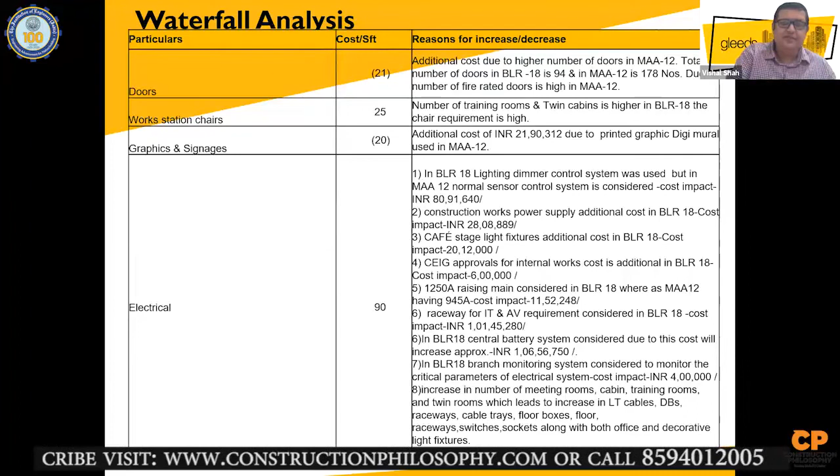So how do you optimize? How do you make sure the client has the right cost? The client has the right information available, so he can make the right decision, right? So these are aspects of the waterfall analysis, what you can produce to make sure that you understand internally why the costs are different from one to another, right?

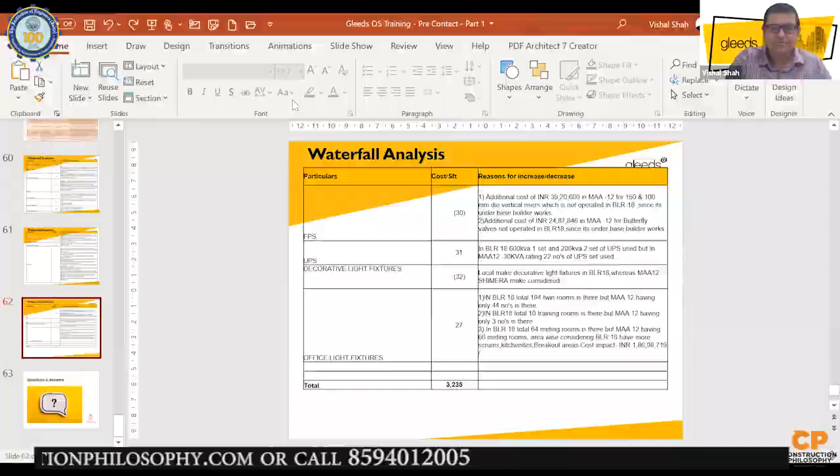So before I close it, I will take you through a parametric cost model. So allow me a minute. I'll need to change it to Excel. Hold on. Okay. So what we have done is, just to give you more explanation about how the residential cost, for example, in this case, works.

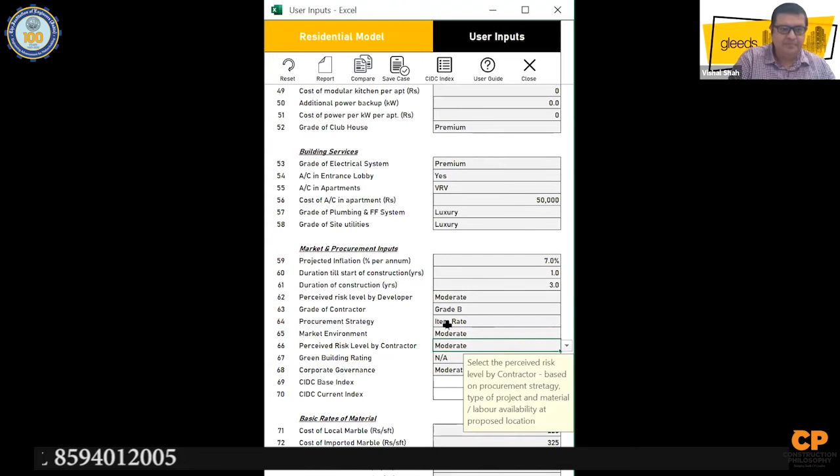So we had broken down the whole cost plan into various kinds of cost drivers. So we looked at about 50 to 60 residential projects, and then we worked out the factors. And based on our benchmarking data, we are working towards what is the real cost which will happen here, right? So, for example, it can have different cities. It can have where the location of the project is. Okay, it can have type of project.

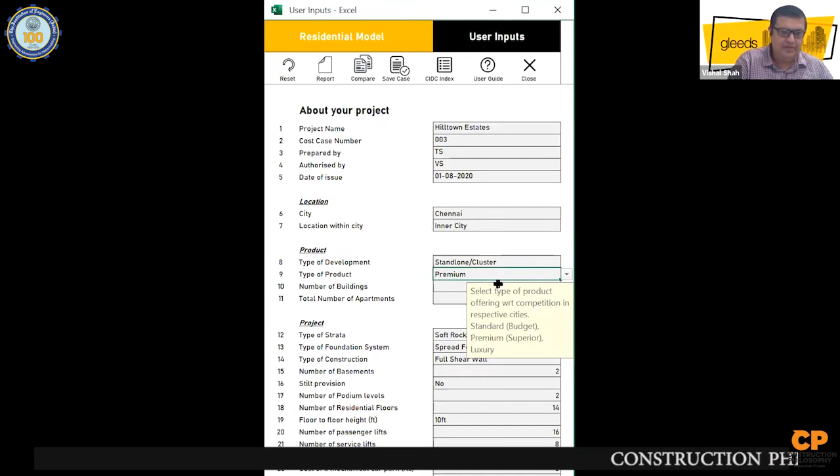For example, standard to premium depends on the type of amenities, and you can have all the factors. For example, soft rock versus hard rock. So all this will basically tell you what kind of project we are into. So say we have hard rock. When we say hard rock, you see the cost of construction has changed, right?

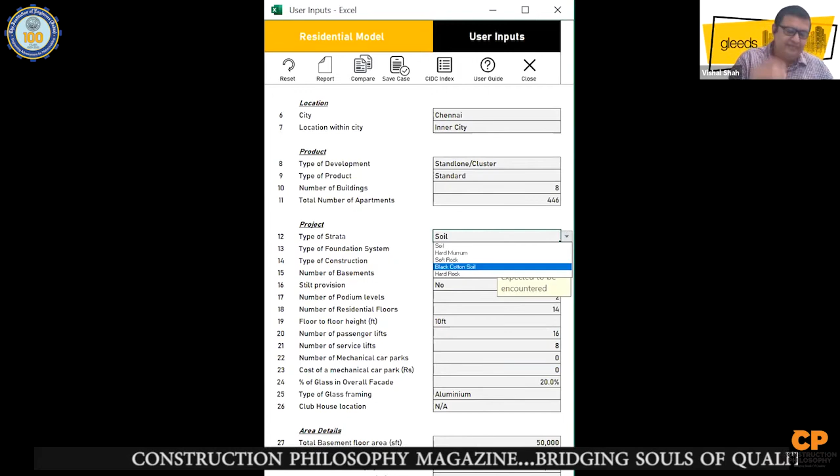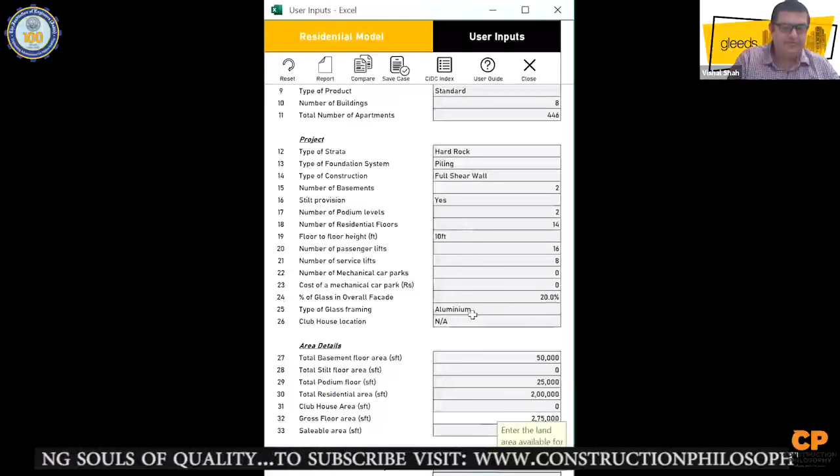So all these are different options people can work out, and based on that, updated real-time cost information can be generated based on all the parameters. For example, the cost of steel, whether it's 42, no, probably we are at 38 now. So 38 will have its own different cost. Then we are talking about 250, no, say 270 today. 270 will have its own cost impact.

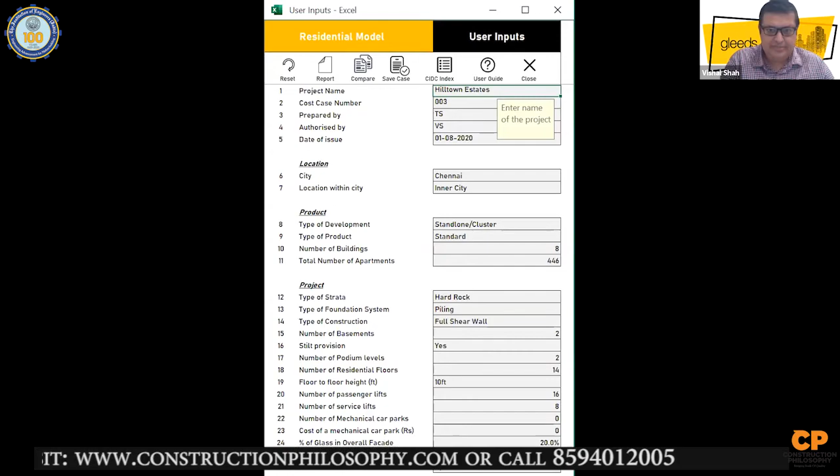So if I share the screen, you can see here the output. My output will keep on changing based on all the cost drivers which I will update. So based on all the cost drivers we are talking about, our cost will have a differential cost.

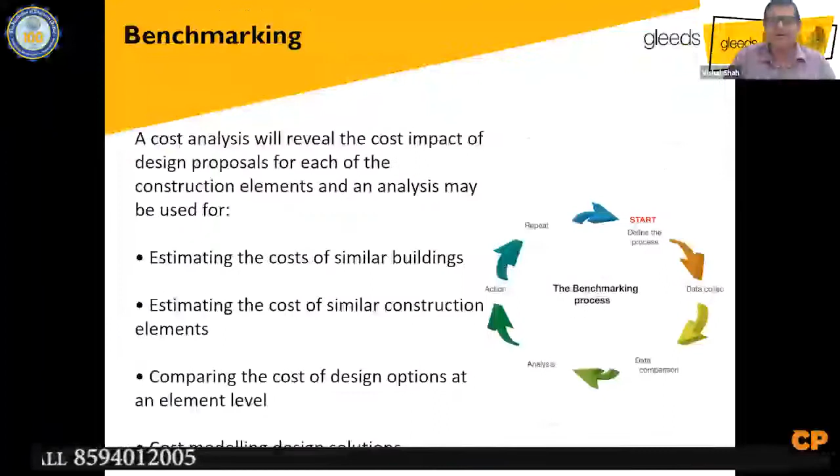So that brings me to the end of my first session on cost plans, how we do cost plan benchmarking and estimate checking, and I'm happy to answer any questions you have on the key cost drivers or anything. So let me know wherever you want me to start answering.

There was a question in the chat box from Shivaraman: what are the factors to consider for management contingency, and what is the normal percentage for projects? ROM is rough order of magnitude, basically an order of magnitude cost plan, a very early one. Typically we carry about 3% for management contingency, but it depends on the level of project, the type of project, and the current client brief status. If the client is very clear about what they want, I can drop it a little lower. But if the client is not clear about the requirements, it will go up.

Okay, Sushmita, on the career in QS. It depends on what you would like to do, whether you're working with a contractor, a consultant or an owner. There are different pathways. You obviously need to get trained under a QS who can give you more understanding about how to do measurements, how to make sure the bills are checked properly, and what documentation to check when you do tendering. So all that you need to think about.